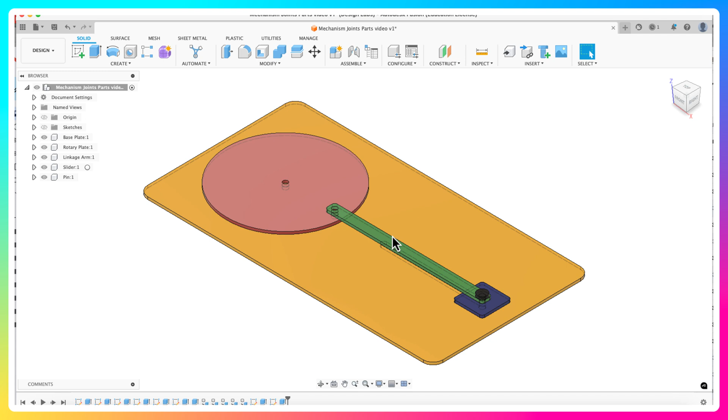What you'll see is ultimately this thing should revolve, this arm should move in and out, and this should all slide together. But if I grab any of these pieces, they actually move around as individual components and are not tied together in any way. That is the function of joints inside Fusion.

It's to apply some physics to them, degrees of freedom. We're going to try to decrease the degrees of freedom that each of these parts can move in. Right now these have a lot of degrees of freedom. I can move it in the X direction, the Y direction, and if I click on it, I can move it in the Z direction. So I have lots of options for how I move these things around.

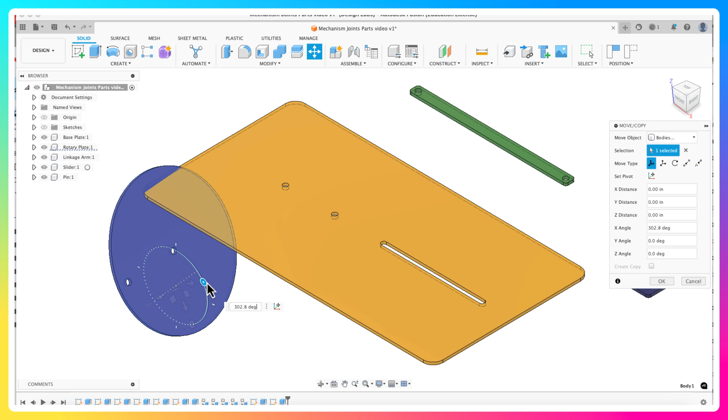I can also rotate this. Again, if I do that same move component and click on this guy here, we can revolve it this way, or this way. Look at all of these degrees of freedom I have about this one part.

The idea behind joints is it is going to limit those degrees of freedom and create relationships between objects. We want to do this in order to constrain these objects so they only function in the way that we want them to.

So to start out, the first thing we need to do is ground something, because right now all of these parts, I can move every single one of them. I can grab this guy and move it around as well. All of these parts can be moved. And if I create relationships between them without locking something down, you won't be able to see the true motion of how these things are designed to work together. So in this case, you have to make a choice about what gets fixed, and for me it's the base plate, because in the real world this is either going to sit on the ground or stand up on a stand, and that's going to get locked.

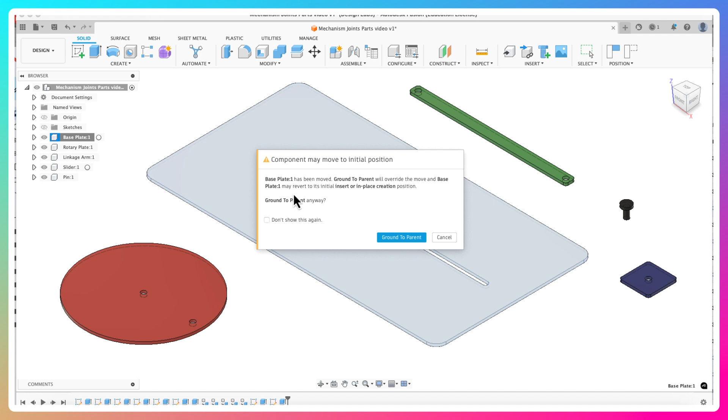So I'm going to hover over base plate, right click, and click ground to parent. This will pop up, and you'll notice that I moved this thing around. It's going to say this will override the move, and the base plate may revert to its initial insert or in-place creation, and that's okay. So I'm going to click ground to parent, and that thing will move back to where it was.

There we go, it's locked there, and you'll see now if I click and drag, I can't move this. If I click and drag, I can move that. Click and drag, I can move that. Click and drag, I can move that. Click and drag, I can move this. So I can move all those other things, but I cannot move the base plate.

Now we're going to start to create joints. There's a lot of types of joints. I will do another video that explains each of them in detail, so I'm not going to take time in this video to do that. We're going to use at least 3 different types here, starting from maybe big to small, or simple to more complicated. The simplest thing is I want this rotary plate to be fixed so that it only rotates about this axis, this center pivot point. I don't want it to be able to slide left or right.

I don't want it to be able to slide up or down. I only want it to be able to rotate about that axis. So I'm really limiting the degrees of freedom about the rotational plane, about movement along axes. I'm getting rid of all of those except for a single rotational degree of freedom.

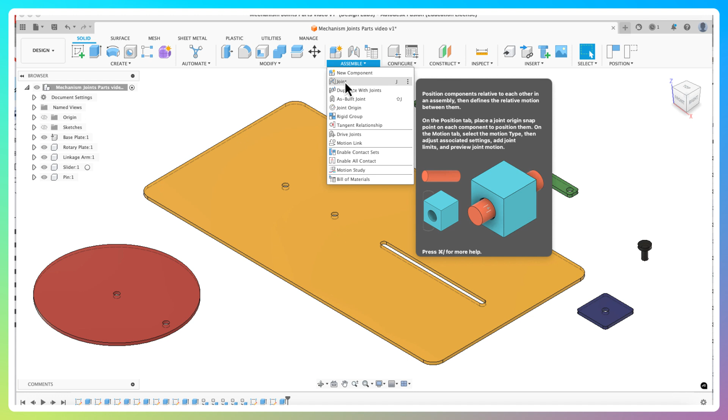So for joints, the icon is right here in the Assemble menu. If your interface looks slightly different, you can find it under Assemble as Joint, or by hitting J. I don't use those keyboard shortcuts nearly as much as I should.

All right, when I do that, it pops up our little menu here. You'll notice there's two tabs. I'm going to click over to the Motion tab, and it's already pre-selected as revolute—it grabs whatever you used last time. If you click on that, you'll see all of these different options for motion. Each one of these is going to constrain your parts or components in different degrees of freedom. Revolute probably has the most constraint outside of rigid, which constrains all orientations.

So I'm going to choose revolute, and for position here, I'm going to keep it a simple interaction between the two components. I didn't mention this, but the important part is you'll note these are no longer bodies—I've made these all components. The only way joints work is with components. You cannot create joints between bodies in Fusion.

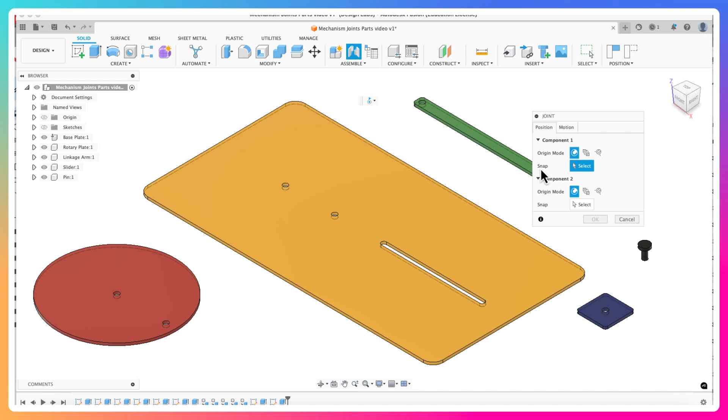So these have already been made into individual components, and now it's asking me, select your components that you want to create the relationship for, and what do you want it to snap to? Essentially, I need to find a common point about these two components, this guy and this guy, where they are going to revolve around one another. This is going to be specific to both point and plane, and that distinction is really critical.

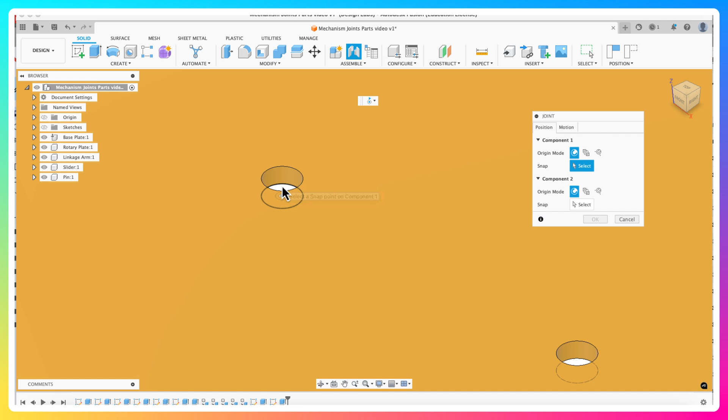So this one's easy. I want to zoom in here, and I just want the top plane. I don't want the bottom one, I don't want the one down there—I want the one at the top here.

And here's a little trick inside Fusion. If you hover over the face that you want, on a PC, hold down Control; on a Mac, hold down Command, and it's going to lock that face. Now you'll note I can't grab that point down below—it's not going to swap between them. And that allows me to select that point.

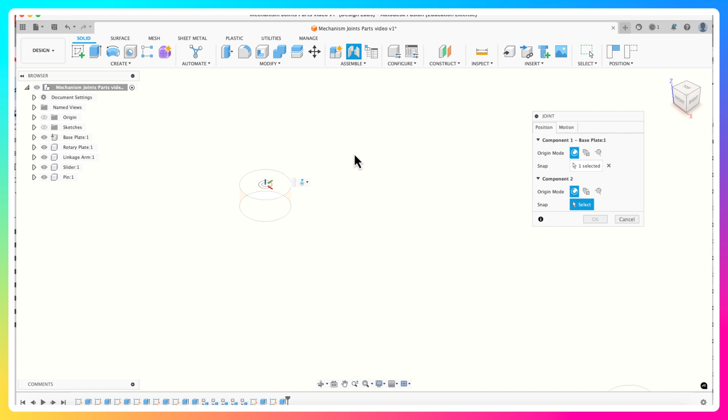The minute I hit the point I've selected, that component will now turn transparent. That's letting you know you can no longer select that. Once you've selected it, now you need to choose a relationship with another component to create that joint, and for me, it's this one here.

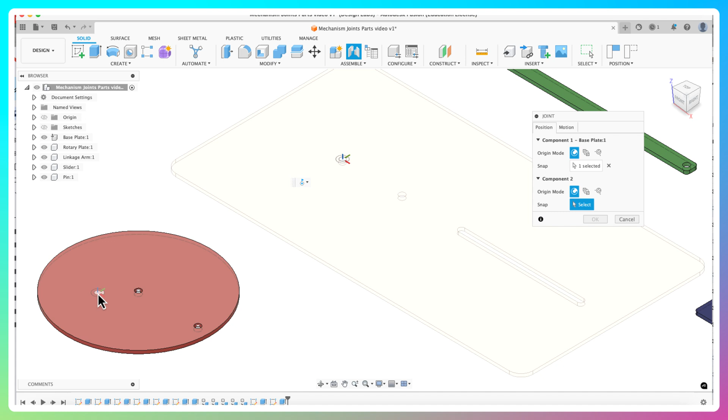But here, I don't want this top face, because if I chose that, it's going to try to put this plane and this plane together, which means it's going to flip this thing 180 degrees, and I want this side pointed up. So I'm going to rotate to the bottom plane so I can see it a little better.

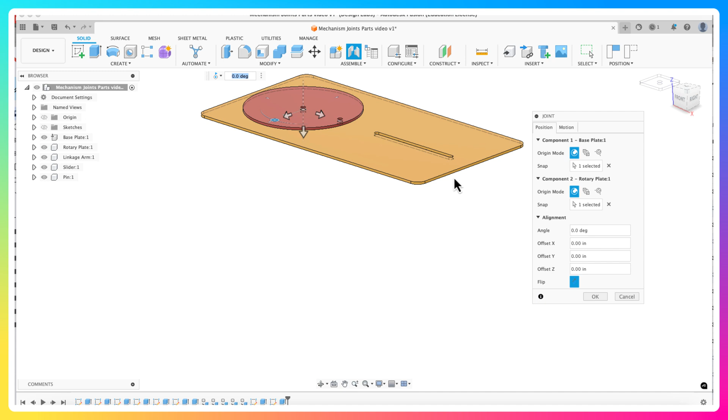I'll zoom in. Again, I'm going to hold down Command once I have this face highlighted, and I'm going to choose that center point. You'll notice when I do that, it's going to move these two things together. And if I click OK, it's going to create that joint.

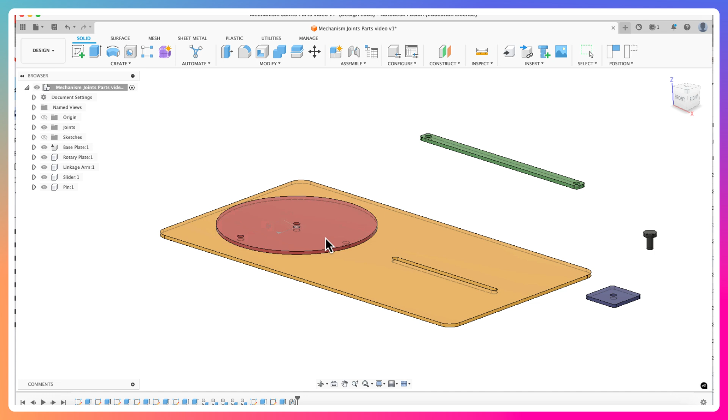All right, so aside from that move, it looks like not a whole lot happened. But if I click and drag now, you'll note I can no longer move it left or right, up or down, but it is now rotating about that axis. So it's created that joint, that relationship between those two center points.

All right, so now we need to do another joint to further constrain these components together. If I were doing this in another format, I would probably choose to create a joint between this hole and this hole here, but I just want to show you how an ungrounded component will not constrain the degrees of freedom that you want—you actually can't see how the joint works.

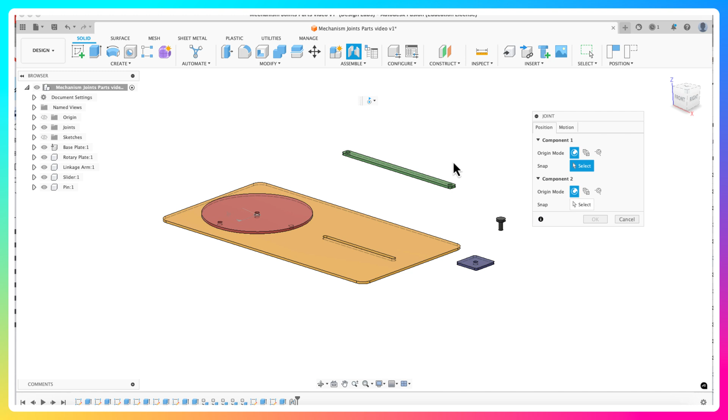So I'm going to use that same revolute joint between this center point here and this center point here. Again, the planes are really important, and I'll show you the flip command here in a second. So I'm going to click joint—again, I could click J—click motion, just to make sure revolute, yep, that's correct.

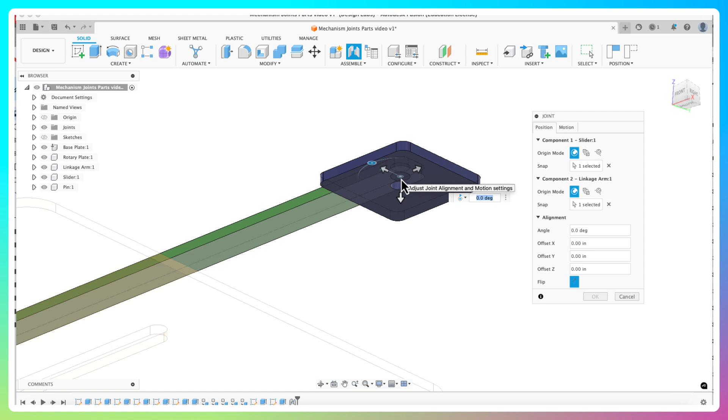What are my points? So I'm going to go over here, find my face, hold down Command, click that center point, and I'm going to come over here and rotate around because I want this bottom face. Hold down Command, click that center point. It's going to move those two things together.

And I'm going to click OK. Oh wait, before I click that, I just want to show you flip. So you'll notice I chose this top face of this component, and I chose the bottom face of the green component.

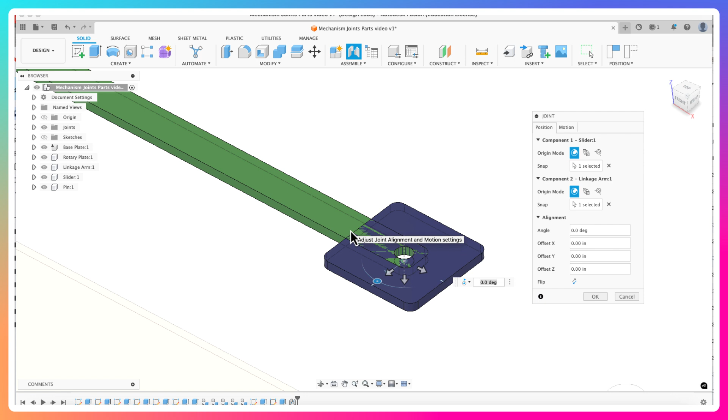If it gives you the wrong relationship between those, there is this little flip button here. If I click flip, it's going to keep those same planes aligned, but it's going to invert the geometry of one of those objects. So in this case, it took that blue part and flipped it 180 degrees. These two things now occupy the same space. I'm breaking the laws of physics, that can't be possible. So that is the incorrect orientation.

So make sure you can play with the orientation of those joints together. Also, you can have an offset in any axis you want in the X, Y, or Z, and I can change the alignment to have a certain fixed angle inside of these joints. But this is good the way it is, so I'm going to click OK.

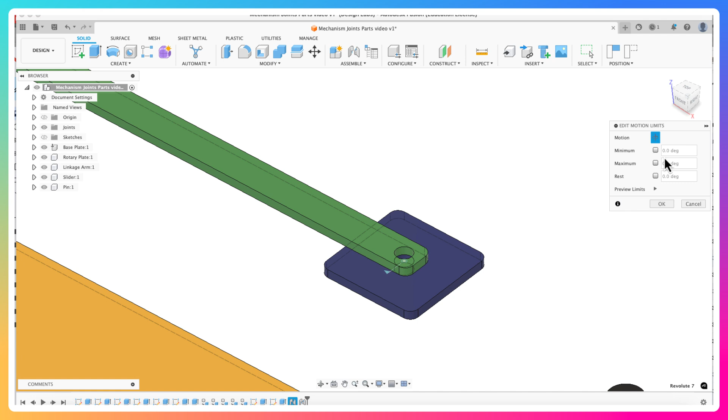You notice when I do this, my timeline, these joints are just like any other feature. I can go in and edit these joints later. I can also edit motion limits once I have them, which is going to constrain how far these things can move in different orientations. But in this case, I don't need to do that.

All right, so I've created my second joint. My first one's here, my second one's here. This one is a revolute joint, so this thing should be able to rotate around this axis. But if I click on this to show you that it's a revolute joint, you notice it's not revolving, it's just moving that whole element. This is what happens if you don't ground something, or if something isn't joined to something that is ground.

It has too many degrees of freedom and you're not going to be able to see that motion. So here, oh, I can't move it, it will rotate. Here I can move that whole object. So that's a clue to me that I need to create another joint between this object and some other part.

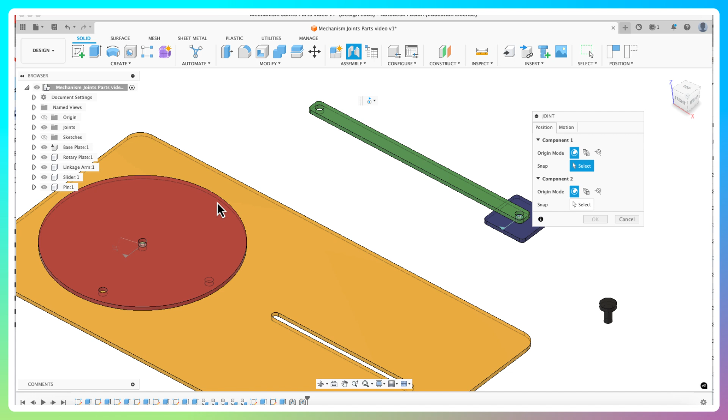Typically work from your grounded elements out. So here, this hole and this hole need to have a relationship, and that's just another revolute joint. So I'm going to click joint, motion, just double check that it's revolute. Position here, I'm going to come over here to my hole, top surface, hold down command, find that center point, super terrific. That turns transparent.

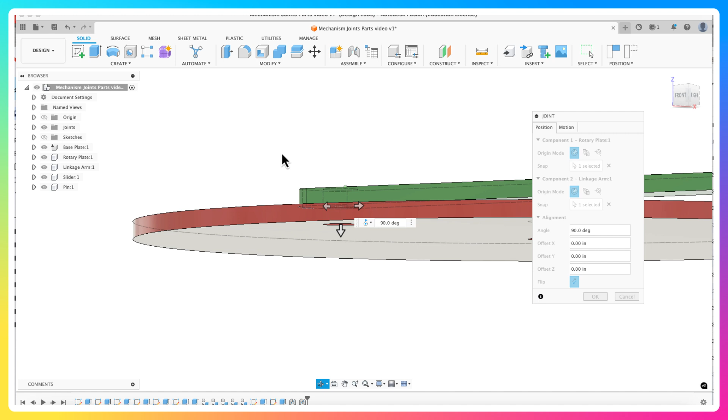I'm going to revolve and I want the bottom face of this guy. Select that, hold down command, choose that center point, and click. It's showing us, it's previewing what that's going to look like. It's moved my disk up to this object. Don't worry about that, that's just previewing that single joint, and then it's going to go back and compute the other joints.

So again, flip here. I can flip these things. Nope, that doesn't look right. Much better. Okay, so I click OK.

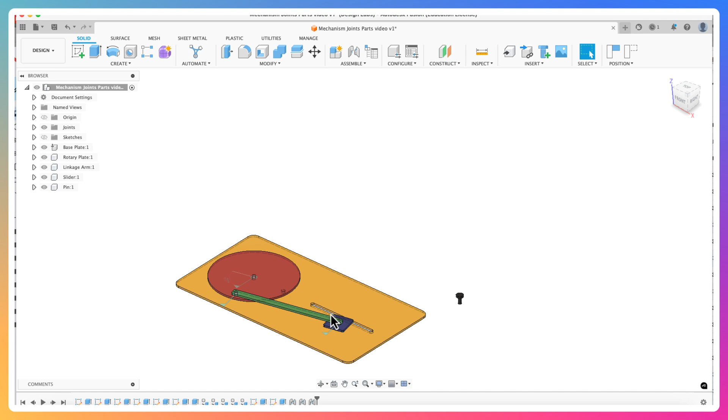All right, so now joint here, joint here, joint here. If I click and drag, ooh, whoa, this thing starts to flip around. You'll see that blue part now can rotate around the axis. If I grab that, you'll see all these things are orienting in all these different ways.

All right, so for this mechanism to fully function, I need this hole to work inside this slot. For that to happen, I need a pin. I want a pin slot connection.

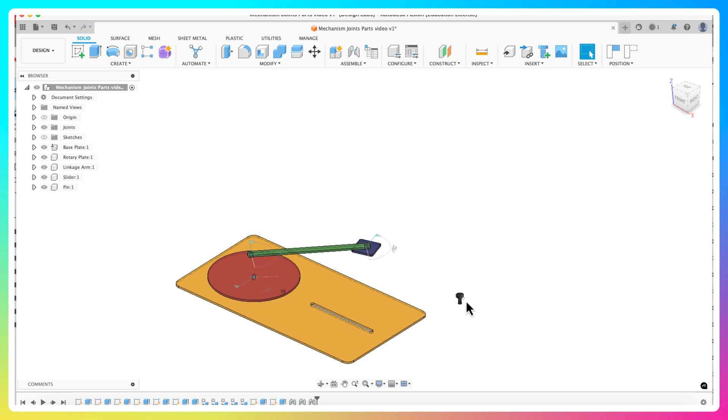Ooh, here's my pin. But if I just do a pin slot connection between here and here, this doesn't have a relationship to the blue and green parts. So I'm going to first create a relationship between my pin and my center hole, and then I'm going to create the relationship between my pin and the slot.

So we're going to do a different joint type here, and I am going to use a cylindrical joint. If I click on joint, I'm going to click motion, and move from revolute to cylindrical. Cylindrical is going to have that same rotational axis like the revolute joint, but it isn't going to constrain in plane. So that pin will be able to move up and down in the Z orientation, and you'll see this here in just a second after I create that joint.

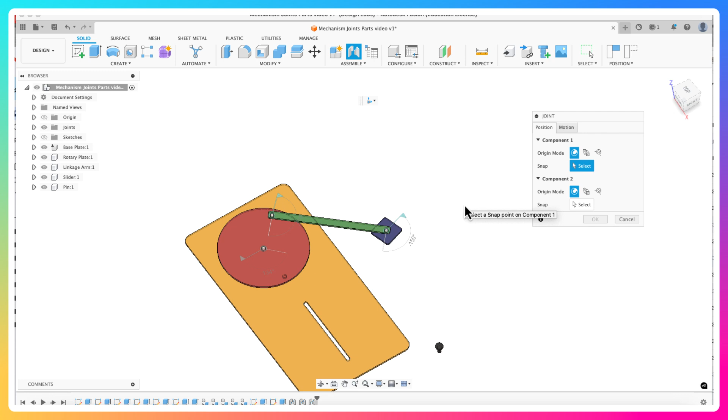My joints are going to be pretty much the same, so I am going to select different components. Here I'm going to revolve around this guy. I'm going to choose the bottom face of this, hold down command, and find the center point. And I'm going to revolve back around, and create the top face of this guy, hold down command, and select that center point. It's going to move those around. This thing can revolve. Again, flip command is there, but it looks like it's the right orientation, so I'm good to go. I click OK.

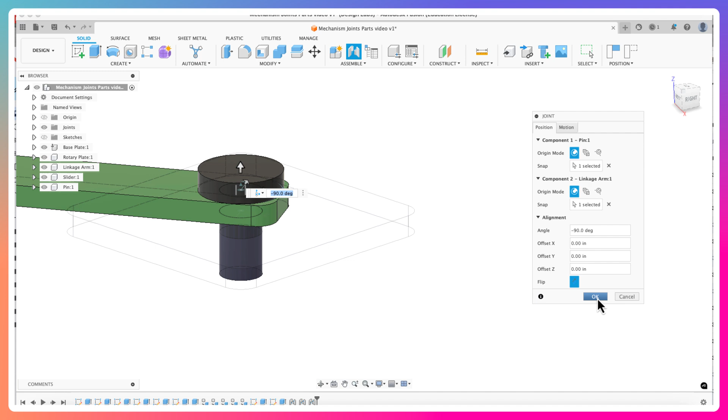And this will, you can see now, I can't move this thing left and right, but I can move this thing up and down, okay?

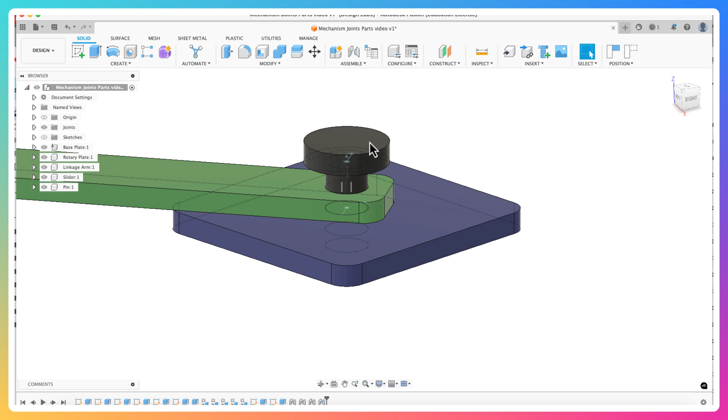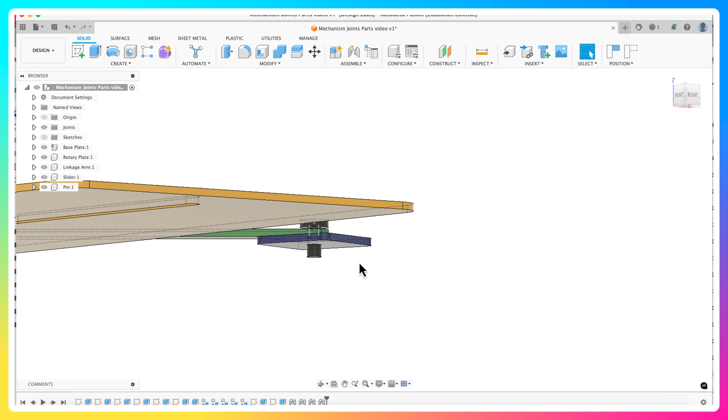So this is important for this particular interaction because the pin slot, when you select something for a pin slot, those planes need to be aligned. And this pin is longer than the thickness of this thickness plus this thickness plus this thickness. The pin is longer than that. So if I constrained the pin so that the bottom face of the pin aligns with the top face of this, the bottom of the pin is going to stick through the bottom of my object. And then if I try to do a pin slot joint, I'm going to get an error that these two things aren't aligned. But by making it cylindrical and allowing this thing to move up and down, that is going to automatically create that relationship between the slot and the bottom of the pin. So I'm just thinking a little bit ahead here about how joints work to try to create appropriate relationships so we don't have an issue with this moving forward.

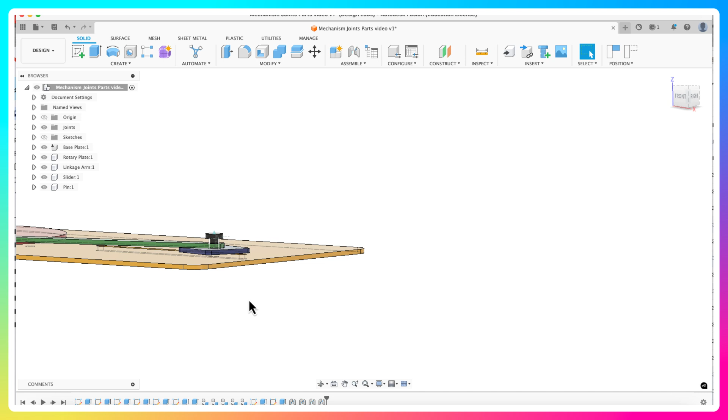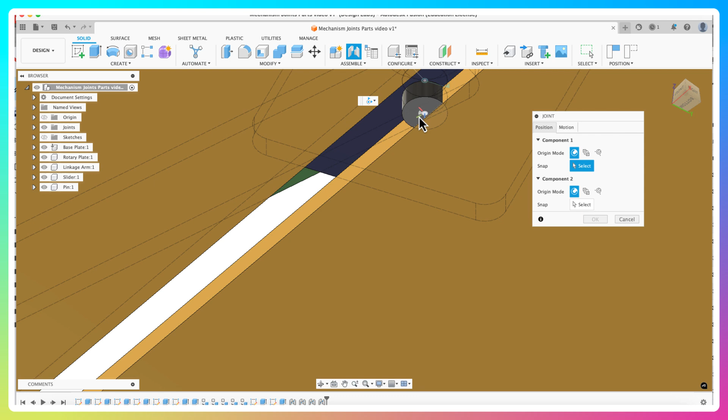All right, so last joint we need to do is the pin slot joint. So I'm going to click Joint, Motion, Pin Slot. This one's so cool. Go back to Position. What am I going to select? I'm going to select the center point of my pin. There you are. And I want to select the center point of my slot. It doesn't matter which one it is.

So again, hold down on the face, hit Command so I don't select the wrong thing. Select that point. Oh, so here's a perfect example. Look, it flipped these guys upside down. That's not the relationship I want. I want my pin above. So I'm going to flip that over and click OK.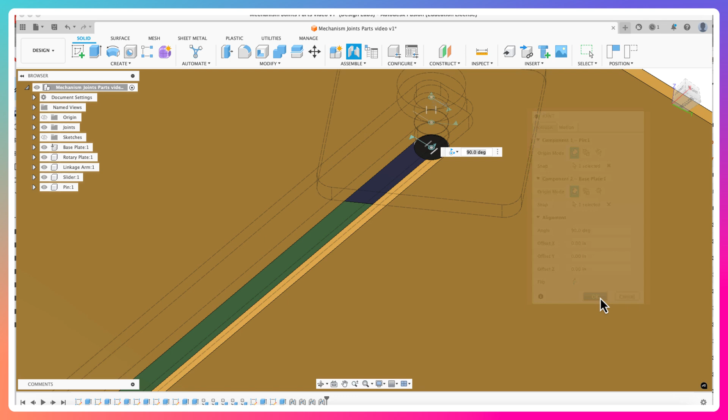And you'll see when I did that, the pin now sits a little bit high. So like, all right, in the real world, do I want that pin to sit up there? Not really, but this allows me to have a longer pin and still create that relationship, because essentially that pin is going to have degree of freedom in the z-axis anyway. So that's showing me that relationship.

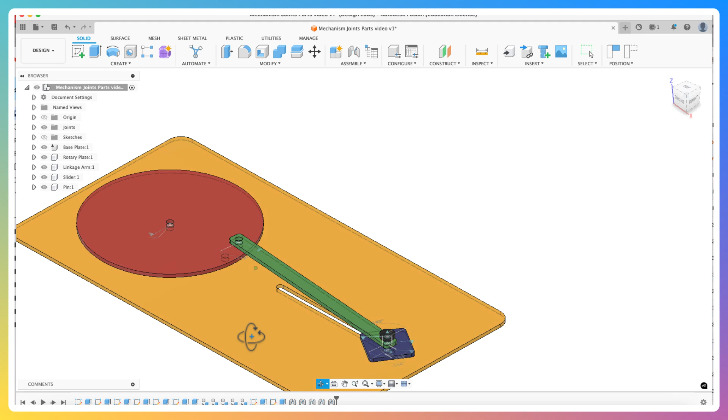The lovely thing about this now, everybody watch, is I've constrained this, I fully constrained this object. So if I click and hold, now this mechanism only works in the way that I want it to, right? So I can rotate this wheel and it's only going to slide in that slot, and we have now demonstrated that this has the right motion.

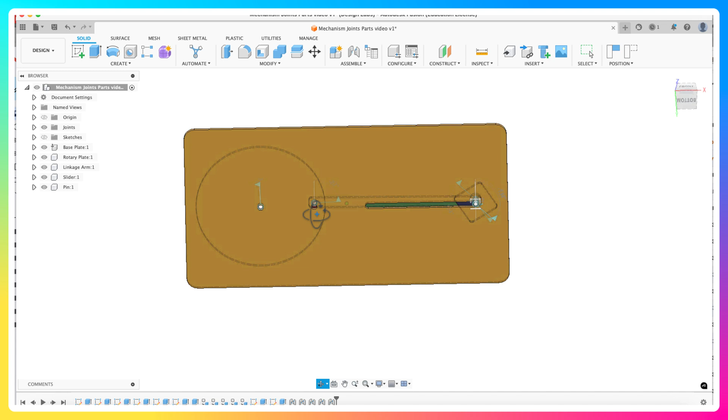I can check motion limits here by making sure when that's fully extended, do I have intersection with my slot? So this allows me to investigate. Nope, I still have room there. Yay, all right, so I've made my slot long enough.

And you can do the same thing, obviously, on the other side. All right, I will do another video to show you how we can automate this by doing a motion study, but we're gonna end this video here.